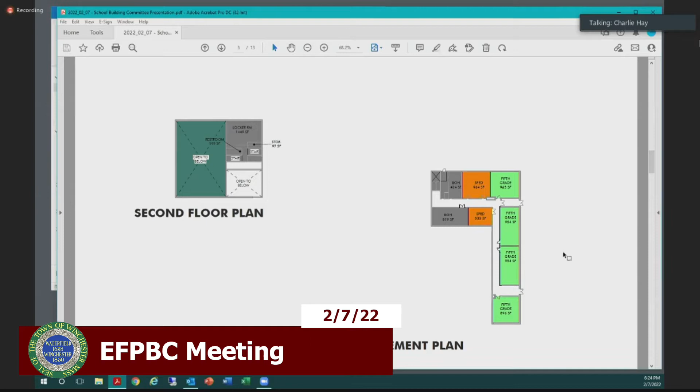So that's kind of how the ad reno works. It's effectively building a big pre-K wing and then completely reconfiguring the existing building and doing a little bit of an addition into a courtyard in order to get media to be the right size. Are there any questions about this option?

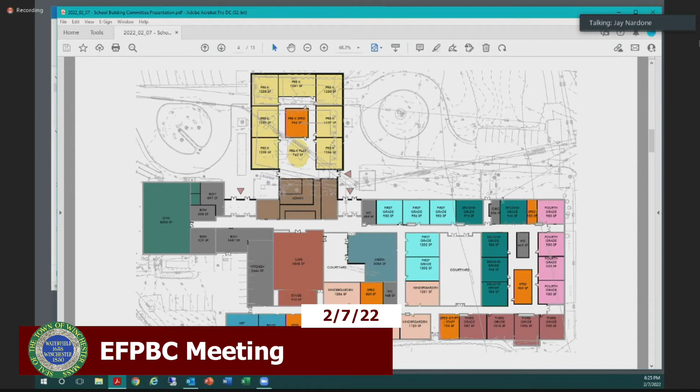Particularly? Comments, concerns? Chris, do you see any hands raised? I don't see any hands. No? Okay.

Not seeing any hands raised, Jay. All right. So the next option, of course, is the replacement option, and you all were focused and mission directed towards mission critical last week, which we appreciated in terms of narrowing down the replacement option, which is really a key milestone in getting us to where we need to get over the finish line for this upcoming PSR. This is the diagram that we started with way back when for an N5 replacement.

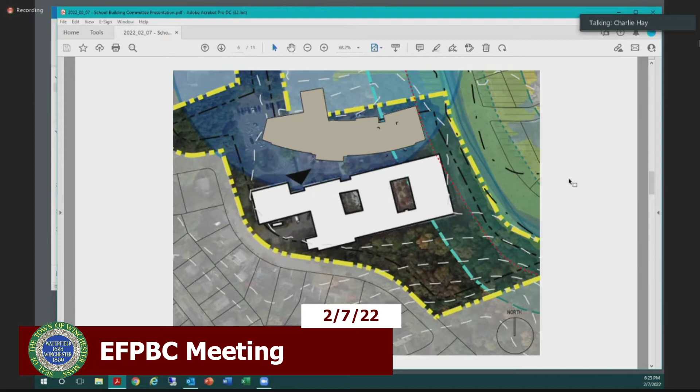It's obviously now changed fairly significantly. This is an updated site plan that was done this week based on a new floor plate. And the building blocks of the building effectively remain where they are in terms of their orientation. But by removing the old building, we open up the entire southerly quadrant of the site.

It allows us to have adequate queuing for cars. It allows us to have adequate queuing for buses and cars. There are multiple entrances, including a separate dedicated or not, and that's a conversation to have, but there is the potential for a dedicated pre-K entrance near pre-K play.

There is a green swath in the center that could have active play. There's the concept of being able to connect the building down to the south into the wooded landscape in the southeast corner of the site, which could make a great place for outdoor learning.

On the northerly side of the building, we now have a connection to the soccer fields and the opportunity for more controlled play or outdoor learning. There's also the opportunity to have something on the easterly end of the building that could be used for outdoor learning, an outdoor classroom.

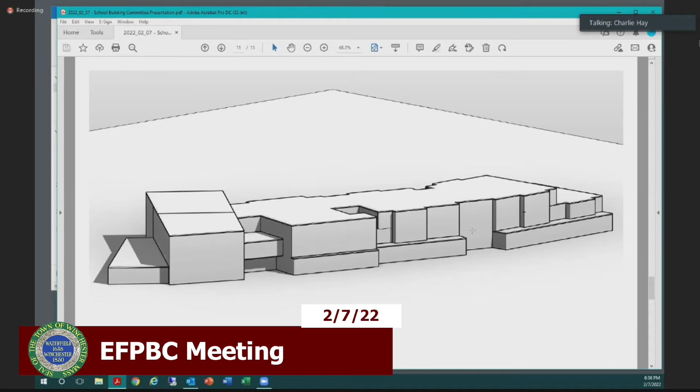The media center you'd see in the front, which could be very nice with a lot of glass, transparency. One of the things we heard loud and clear in the visioning session from parents was trying to make the building seem welcoming and transparent, safe but transparent, so that when parents arrive they're oriented, they know where they are. So one of the thoughts is that these kind of knuckles, these angled pieces, have on the first floor a lot of glass for a lobby so you can really see into them and be oriented.

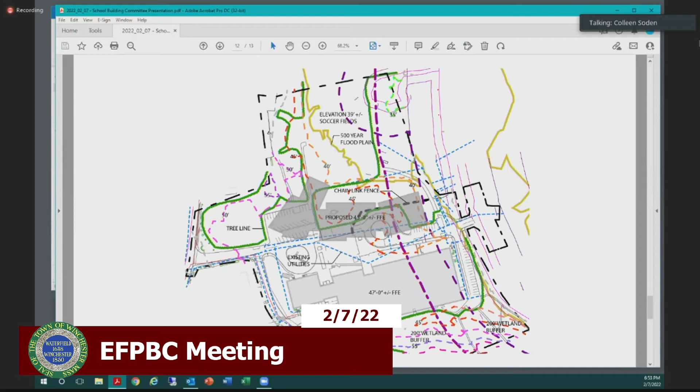I did, I wondered if you could pull up the site plan. And I apologize if you talked about this, I had two public meetings at the same time today, so I was trying to keep tabs on everything. I don't know how. I'll just give some overarching context, because I think this is the same plan that we saw before.

My conversations with Lynch parents and what we're really excited about with the potential of having the building located in this area comes down to a few things. One is opening up that front yard to the nature trails. The second is the fact that the site is completely car-focused on the left and right, and then we have this small sliver play area in the middle that's not very safe for little kids.

This could be something that gets worked out later, and Charlie, you can tell me if this is too preliminary to focus on. But my thinking is, in small ways, if we could take that 50-car parking lot—currently the cars, mostly staff, park along what's similar to where you have the driveway next to Horn Pond Brook Way, there's a series of spots—if we could divide up that 50 and place it along the roadway here.

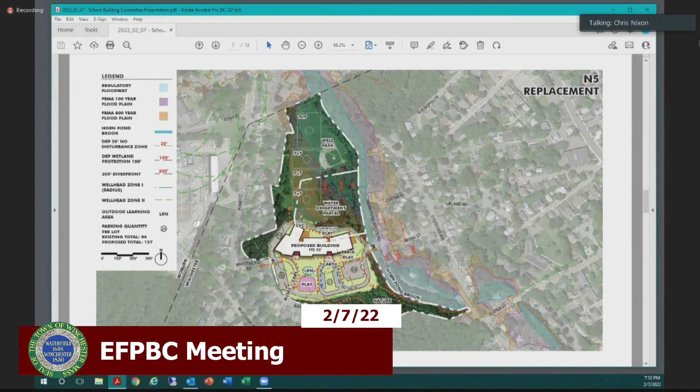Chris, you have another question? Yeah, so I wanted to share my screen with everybody so you know where to find this information again. So if you go to the district webpage and click on school committee, you pull up the school committee webpage. You go to news and special projects right here, and you will find a big page on the carriage house, some background, and Tappé's presentation to the school committee in September.

There's also links to the WinCam meetings. You click right here, Central Office Relocation Study, and that pulls up the entire report. It is 130 pages.

It's the one from September though, Chris, right? It hasn't been updated since then. No, okay, so this was basically a schematic report in September, and then we took that to town meeting and got the funding to sort of move the football one more down, if you will. So this is the latest, and it has the narratives in here. Section 4 is the cost estimate, project cost summary, and so forth. So that's where folks can find that.

Sorry, I misunderstood, I thought there was a new version. That's what I was looking for and I couldn't find it. But no worries. Geetha, you have a question?

Yeah, I just wanted to add to Colleen's question. I guess since you brought it up here, I was going to hold it until the sustainability meeting. But anyway, Colleen, I would definitely encourage you to go see the MSBA site, especially regarding geothermal. They had the Arlington High School example, which had failed for certain causes. Right, I'm working on that one.